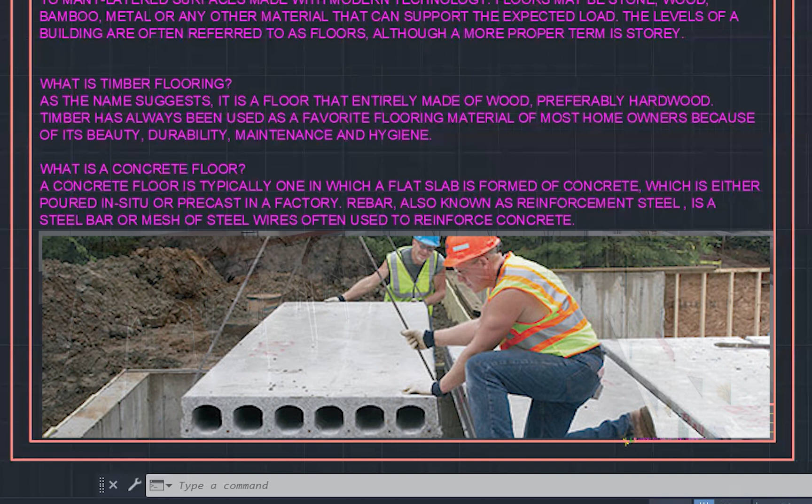What is a concrete floor? A concrete floor is typically one in which a flat slab is formed of concrete, either poured in situ or precast in a factory. Rebar, also known as reinforcement steel, is a steel bar or mesh of steel wires often used to reinforce concrete.

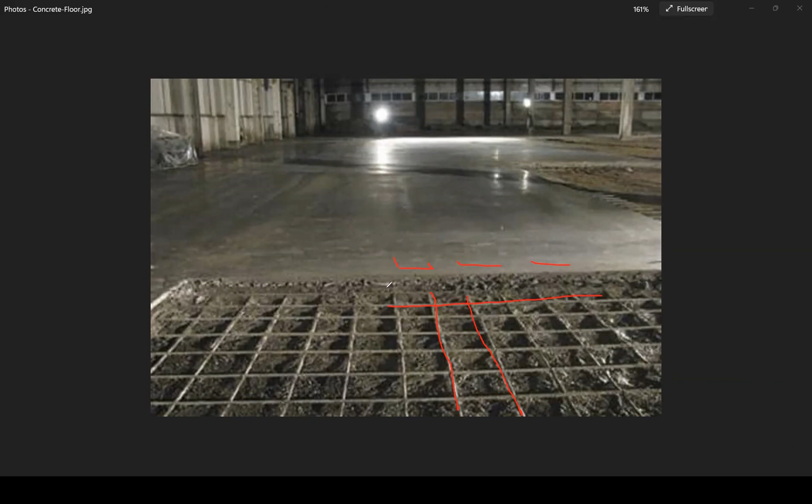This is a concrete floor, and these are the steel bars, the reinforcement bars I mentioned earlier. And this is the concrete here. So you will walk on top here. In this image, you're able to see the steel bars and the concrete, and everything that's layered together to create that floor.

Here's a clearer image of what I was just describing. Again, you can see these steel bars, connected to other steel bars in here. Concrete is all in here. The finish looks like polished concrete because it has that shine and gloss to it.

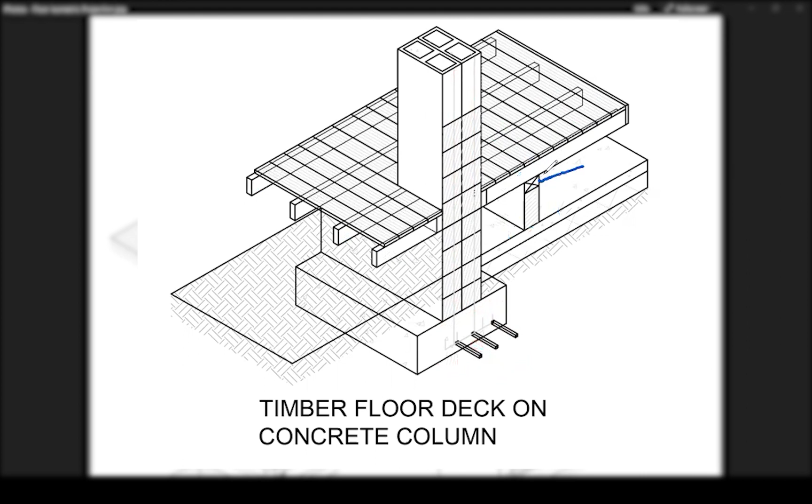You're probably wondering, what's this here? This is a sleeper wall which helps support the flooring. It's made up of block work, this area here. At the top here, that's our wall plate. Let me try to scribble 'wall plate' there.

You would also find a wall plate in roof construction. That's where else you would find a wall plate. So if you are familiar with roof construction, you would recognize that the wall plate occurs there too, in timber pitch roof construction.

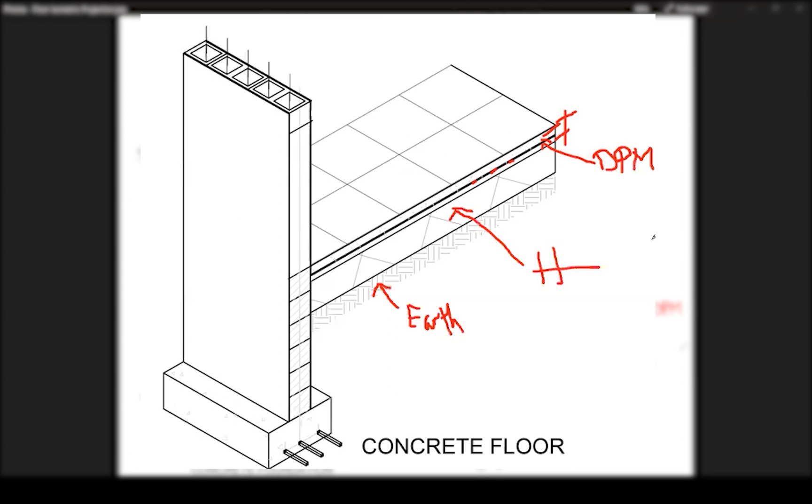Today we are going to be constructing a timber floor and a concrete floor, combining the two of these. So we're going to have two floors, a timber floor and a concrete floor. Let me just show you what a model looks like so you can better understand this process.

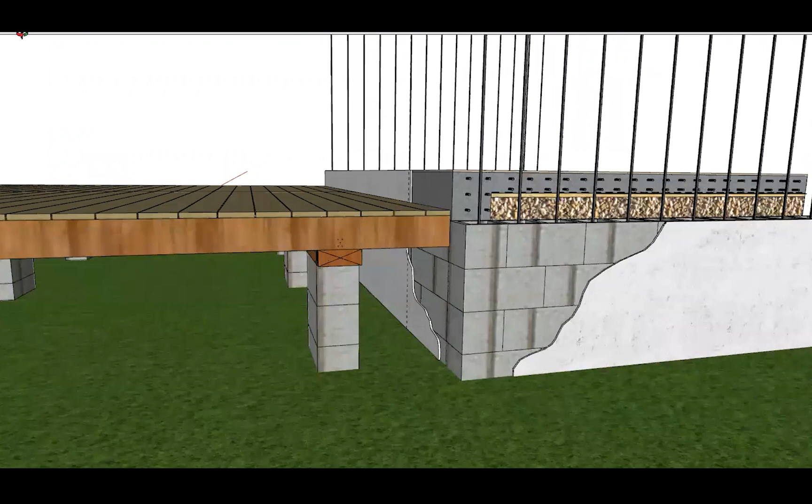Let's take a look at these connections before we start this process. I'm going to come here to scene one. Here is the wall plate that I was talking about, and this is the block work.

This right here is our floor joist, this piece of timber. And then above the floor joist, we have our tongue and groove boards, or our close boarding. So those are the main elements to how this detail is constructed.

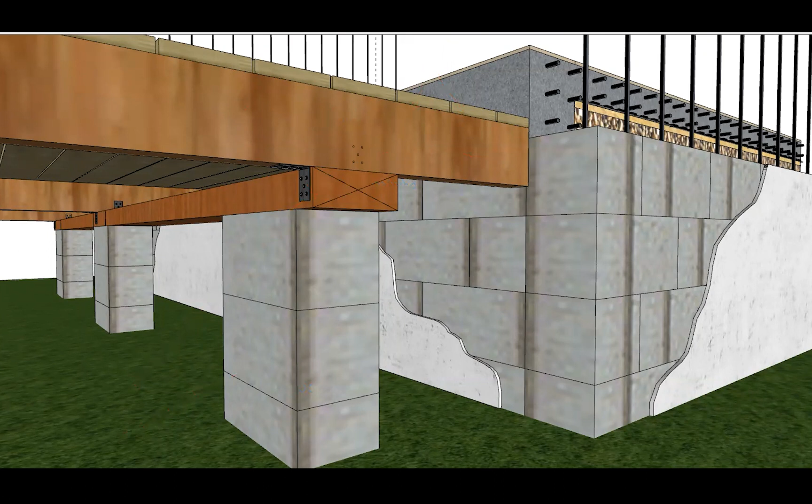But let's look a little closer, go a little deeper. We have here some connections. These make sure that the two members of wood are stable, with the wall plate stable to the floor joist. Throughout this construction you'll be seeing these connections.

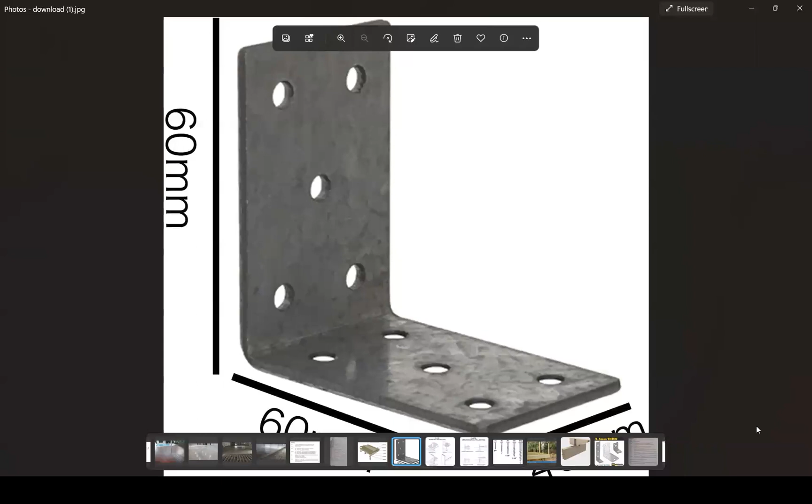What are these connections? These are the brackets here, approximately 60 by 60 by 40, and we use a set of screws. These brackets are about 2.5 mil thick - let me show you, this is the thickness here. This is about 2.5 mil thick, though I've seen some that were 4 mil thick, so they vary between 2.5 to 4 mil.

I think this gives us a general idea of the construction process and the elements we use to create this unit, which is a floor. For my model, I've been using 5 and 3/4 inch screws, and I placed those right here.

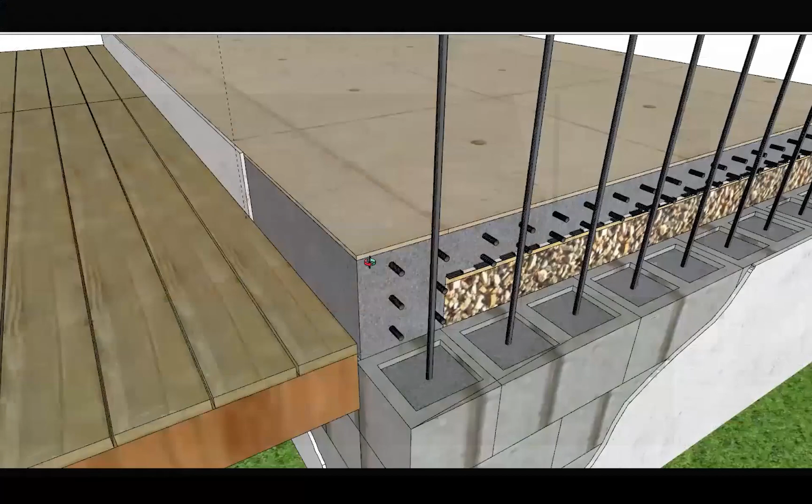Now let's look at the concrete floor. It's made up of reinforced concrete, a layer of poured concrete with steel bars sticking out for reinforcement. Underneath here we see our damp-proof membrane, which I've represented in black and white. This stops moisture from getting into the concrete floor.

Underneath that you can see a thin layer of sand screed, about 20 mil thick. Then below the sand screed we have our hardcore base, about 280 to 300 mil thick.

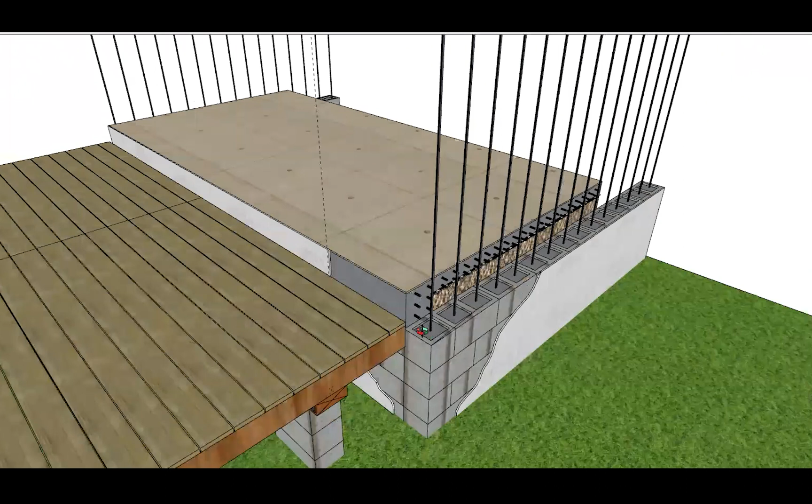Now that we've listed all the main elements that go together to create this detail, I am going to start drawing this detail in AutoCAD. This is what a finished orthographic projection would look like, and I can also show you a finished isometric projection.

As you can see here, this is the timber floor, this is a door, and this is the concrete floor. So we're going to produce both of these today. Without any further ado, let me get started.

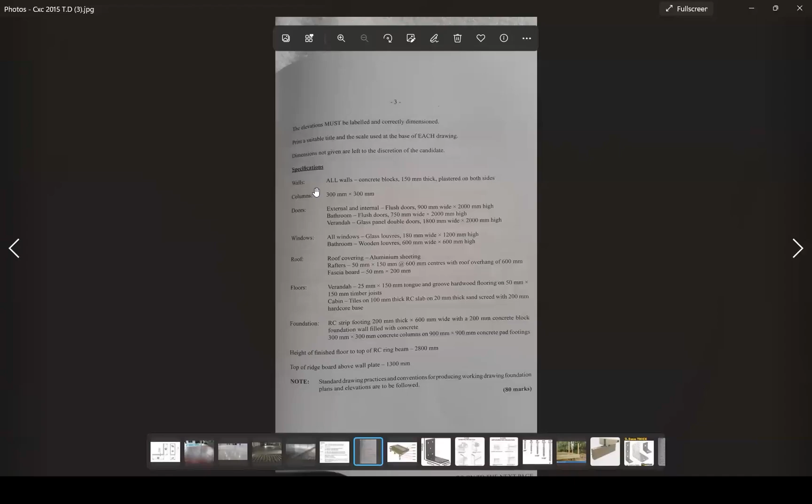But we need some specifications to get started - that's the one thing I need to go through. Let's look at these specifications. I got these from a previous CXC examination, and I think they are useful.

I would encourage all students to just learn these numbers, have them in your head, because they can help you outside of school when you're past this stage of your education. For example, when creating a foundation, you can use a 200 millimeter thick by 600 millimeter concrete base at the bottom, and then a 200 millimeter concrete block foundation wall to cast the walls from the foundation up to the floor level. So what does that mean?

That means then that this would be that - the 200 on the short side, the 600 on the long side. And then you can cast a wall 200 going up there. So this gives you some practical numbers to work with rather than you guessing.

Okay, let's read this out. All walls are concrete blocks, 150 mil thick, plastered on both sides. I don't think that would apply to us because we are only dealing with the floors. The 300 by 300 millimeter column wouldn't apply to us, nor the doors, nor the windows. The roof would apply to us.

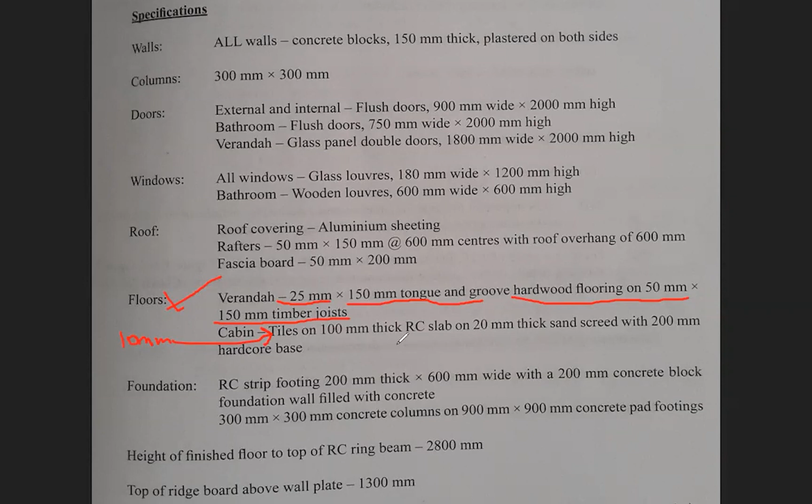But let's look at the floors. It says here, veranda is 25 mil by 150 mil tongue and groove hardwood flooring on 50 mil by 150 mil timber joist. So this is useful information. Cabin, I'm going to use 10 mil tiles on 100 mil thick RC slab on 20 mil thick sand screed with 200 mil hardcore base.

So they're using 200 mil for the hardcore base. I use in my model 280 for my hardcore base. No problem, we will use the 200.

Lastly, let's just read the foundation. RC strip footing, 200 thick mil by 600 mil wide with a 200 mil concrete block foundation wall filled with concrete. 300 by 300 mil concrete column on 900 mil by 900 mil concrete pad footings.

Okay, so this gives us some useful information. So let us break this down and use it now to create our orthographic projection first, and then we're going to move on to the isometric projection. So I'm just setting up my screens now at this stage.

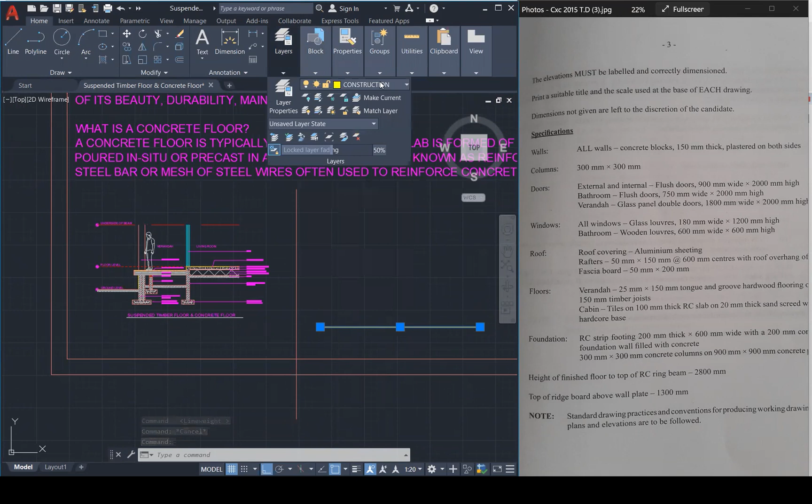Right, okay good. And I'm going to start off on what layer? Construction - yeah, that's a good layer to start with. I don't like how thick this construction layer is, this shouldn't be that thick, so I'll turn off my lines and my construction layer should be thin.

Let's start off with my construction. So what's the first thing I'm going to do? I am actually going to build the floor, the tongue and groove floor, on the 150 mil timber joist, and then attach it to the foundation. So I'm going to start off with the veranda 25 mil by 150 mil tongue and groove board.

Right, so I'm going to offset my 25 mils up. 25 mil, and from this line I'm going to offset 150, 150. All right, so this is approximately my distance - approximately one tongue and groove board.

What I'm going to do is copy this distance, then array about 20 times. Cool, so that's my 20 tongue and groove boards, I'm just going to use 20. So those are my tongue and groove boards in.

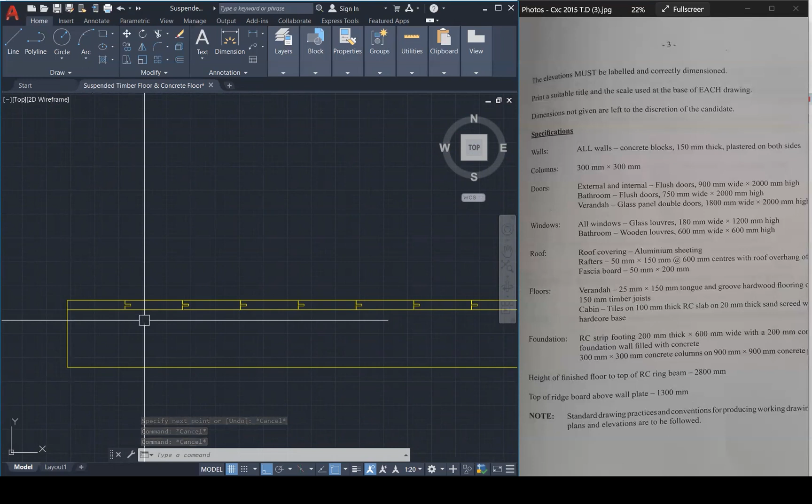Now, what am I going to do? I'm going to place my floor joist. My floor joist is 150 mil, so I'm going to offset 150 mil downward to get my floor joist - that's my floor joist. Let me just close that off, so that's my floor joist there, and the way how it's being laid, that's all we need to represent the floor joist rectangle.

Now, what am I going to do from here? Now we need to rest this on 300 by 300 columns. So let me just start - where do I want my columns to start? I'm going to start my column here. I'm going to offset it 300, which is basically 150 twice.

So actually, you know what, I'll offset 150 so that people would be able to see that this was made from 150 plus 150, sorry. So this is my 300 wall.

Now, I need to give this a foundation. So let's look here - it says 300 by 300 concrete column on a 900 by 900 pad footing. So that means then that wherever we get to our base, let's assume the base is here, this is going to be 900 by 900. Whereas the last one was 600 by 200.

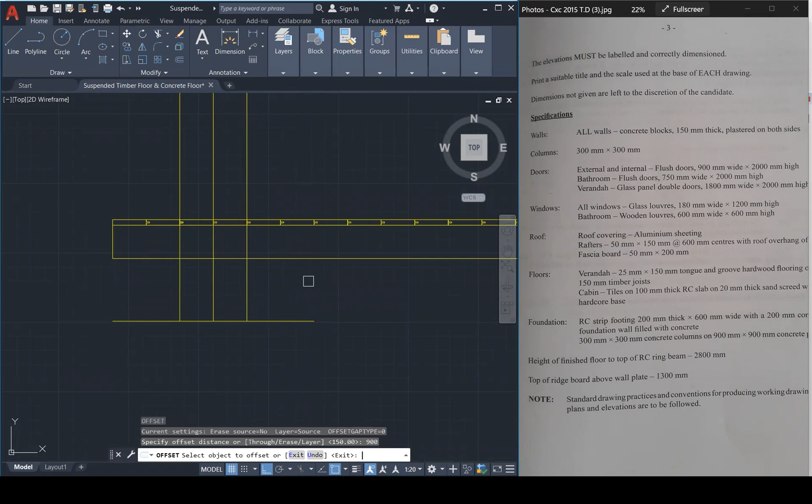And it's going to be 900 by 900, just going to be fairly massive, so I can offset down 900. Let's see how this works out. So that's what they're telling me based on it being 900 by 900.

So this is my concrete 900 pad. This is my column going above. I don't know the height there yet, but we will get back to that later on.

Now I need to create a ground level. I think I'm going to bring this down further, so this gives me more space to play with. I'm going to create a ground level about around here.

And then I need to put in my sleeper wall, which is right over here. I was going to make this sleeper wall 100 millimeter thick, starting right here. Actually, I'll use 150 since they said all walls are 150. Let's do that, offset 150.

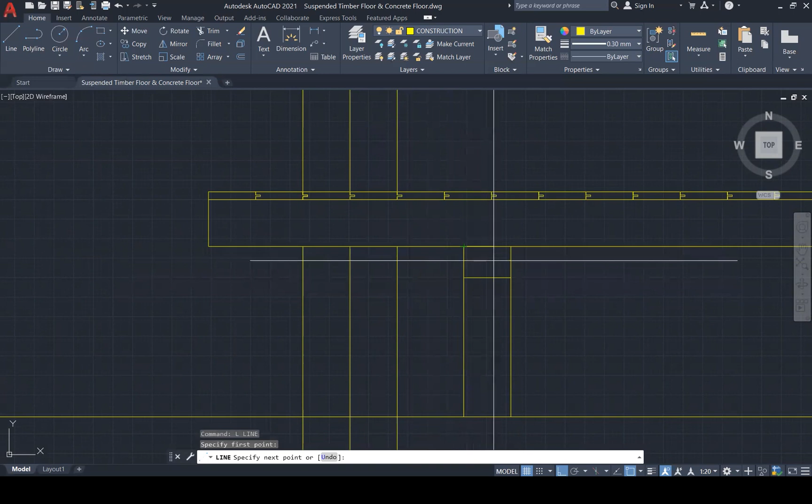Okay, let's put in a wall plate. I'll give this wall plate 50... actually I'll use 100, 100 is my wall plate thickness. Wall plate there, and then put my X to show it. Okay, so that's my wall plate, and that's my sleeper wall that's in there.

Now let's just assume that this detail ends here, because we basically join this with the veranda deck, and we don't have any distance as to how wide it's going to be, so we don't need that distance. We just need the elements that go together to create this detail. So that's the important bit.

So far we have in our foundation a concrete pad, which is 900 by 900, very massive. We have our block walls going up to create the column. We have in our tongue and groove board, our joists, our sleeper wall, and the bricks that hold up the sleeper wall.

Now let us create the connection here as to how the concrete floor interacts with the timber floor. Interesting, now we need to step up. How much do we need to step up? We normally need to step up about, let me measure the step up from here so I can give you the correct distance.

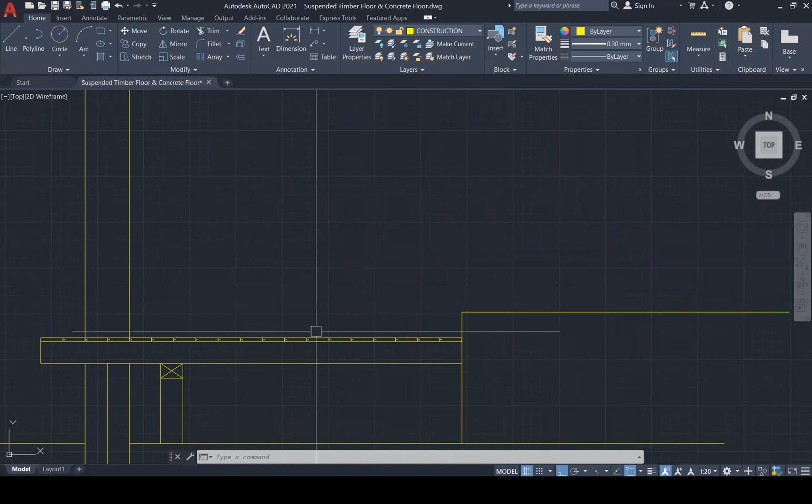Our RC slab is 100 mil thick, but the tiles, like I said, I'm going to put those at 10 mil. So I'm going to offset 10 mil above here for my tiles, and then from this line I'm going to offset 100 mil down to get my RC slab thickness. So this is 10 above and 100 below.

So go offset 10 above, 100 below, and these walls are going to be 150 thick. Although what it says here is interesting: the concrete block walls are 150 mil thick, but the walls coming up from the foundation are 200 mil thick, right?

So we've got to work with the 200 mil thick walls that come up from the foundation up to the floor, not the 150 mil thick. The 150 mil would be above the floor. So anything above here would be 150 mil thick, right? Once it's below here, it would then be 200 mil thick because this deals with the foundation wall.

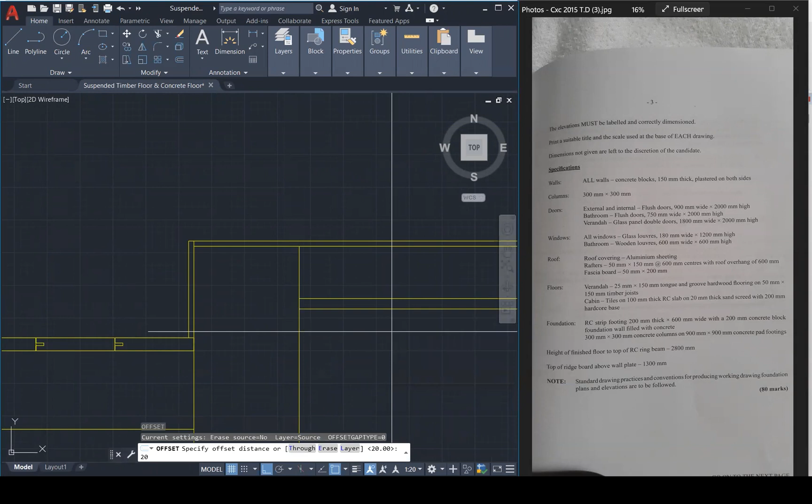Put in 10. So 20 didn't go in, so I can just delete that and offset 20. Got my 20 mil thick sand screed, and then my 200 millimeter hardcore base. Offset 200 millimeter hardcore base. Cool, so I got it all in.

And on this now, this goes down. So let's bring this down to at least one level so that we can all start our foundation line here. Let me just trim here. All right, so what am I going to do at this level? I need to create my 600 by 200.

Find the center, opening this to 300. I know your distance needs to be, total distance needs to be 600. I'm going to just set this down to 200. And I got that, right? Draw a line there, draw a line to there, and that's it.

I think I'll join these lines. J for join, select. These lines are now one horizontal line. Yeah, they're all joined. So that's my base. And now what am I going to do?

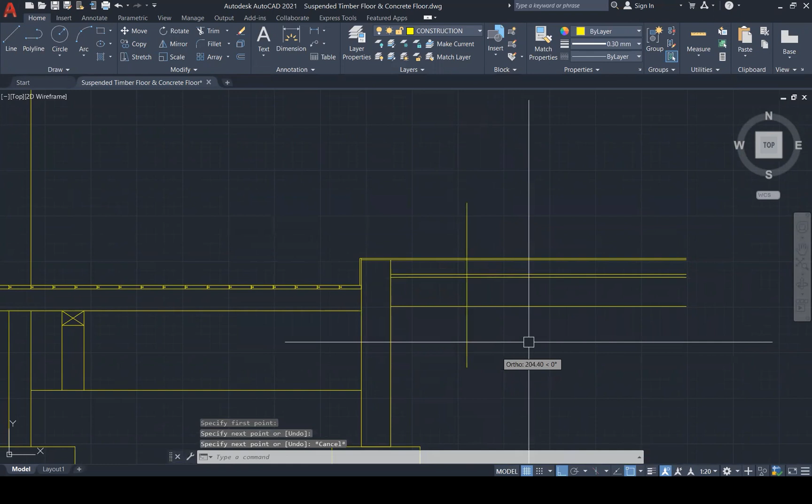I'm going to start hatching and start putting these into respective layers. So I need to cut off this floor because this floor doesn't need to go all the way back here. So I'm going to just snip this floor here, and so that floor would end there. And this essentially would be our floor, our concrete floor and timber floor detail.

Now let's start putting in some textures in here so that this can come alive. So what I'm going to do is give the ground a thickness, or the earth here, a thickness of about 200 mil. Yeah, it's very important to do this.

Now I'm going to start putting in the hatch for the earth, and this is the earth hatch over here. What hatch did I use? I use earth, and a scale of 200 millimeter. Just 200 is the scale factor, and 45 is the angle. What I normally do is hit H for hatch, put it in, and then I would match these back here. Then I remove the bottom line of the earth, to show that the earth continues, so I don't restrict the earth into a box, right?

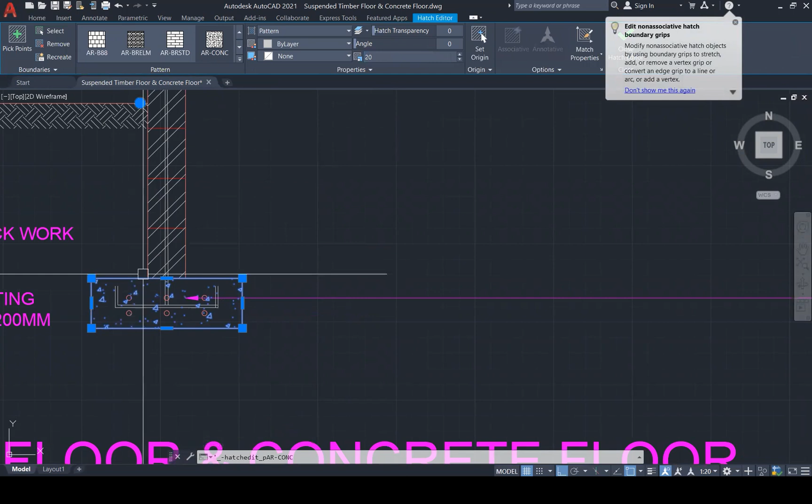Now next thing, I need to put in my concrete. So the concrete is going to be at the base. Let's go over here and see the concrete properties. What did I use? I used AR-CONC, scale of 20, no angle needed. H for hatch, and put that in there. And match prop that so I can get the color and it can go into the respective layer, the proper layer, which is the hatch layer. Yeah, so that's my concrete in there now.

Now what am I going to do? I need to put in my block work. This is my block work. I use ANSI 32, again that's ANSI 32, that's the code name. The scale factor is 200, no angle needed for this one. So put that in.

It can be done like that, or it can be treated like here. How am I going to treat this, resolve this corner detail? I think... you know what, I know what I'm going to do. I know how I'm going to resolve this.

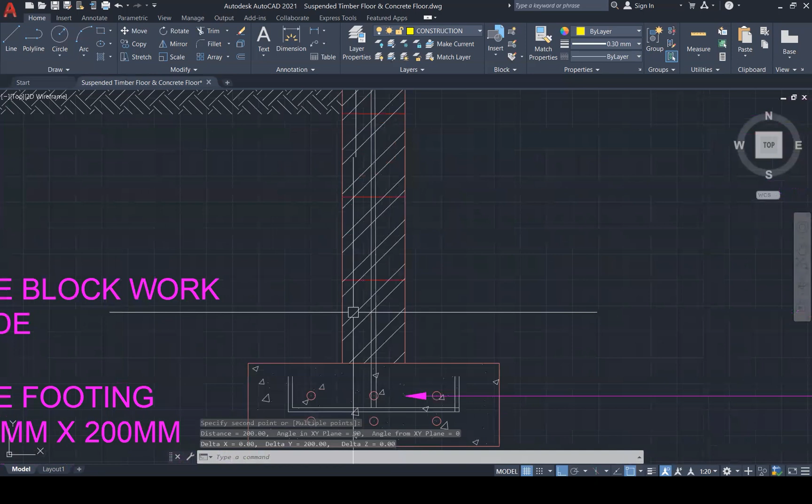Let's start putting in these lines which indicate the bricks. So each one of these lines indicate the levels of the bricks. What's the distance between bricks? The brick is about 200 mil, so I'm going to offset 200 mil to where that last brick line goes. Then I'll put the rest as concrete. That's 200, 200. Okay, so that's roughly about there.

So that means this is concrete. In here, then will be concrete, so I can just start putting it in. But these are bricks, bricks, bricks, bricks, bricks. Let's trim these in.

So these give the builder an indication of how many bricks you would need before we get down to the base: 1, 2, 3, 4, 5, five bricks, five levels of bricks. And then we get down to where our base is, our concrete base. Now let's do the same thing over here.

Look for, remove this, remove this, remove this, remove this, making the detail look neat as I proceed.

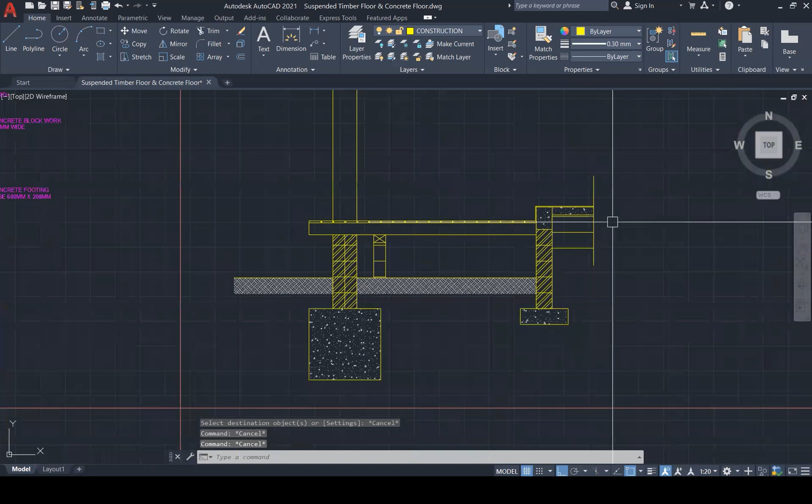So I don't want this detail here. I don't want this expression here to represent my concrete, but it's already in here, so I'm going to just match prop and change it to what I want, just like that. Okay, also all in here is concrete. And then match prop it. And that's our concrete. Now I need to put in my blocks here. Block, block.

Probably just might be in there. Concrete, you never know. In there, concrete. Anyway, let's move on. So far, so good.

This is going to be earth down here. Let's open up that to show that the earth continues. This is going to be our hardcore, which is represented with these triangles.

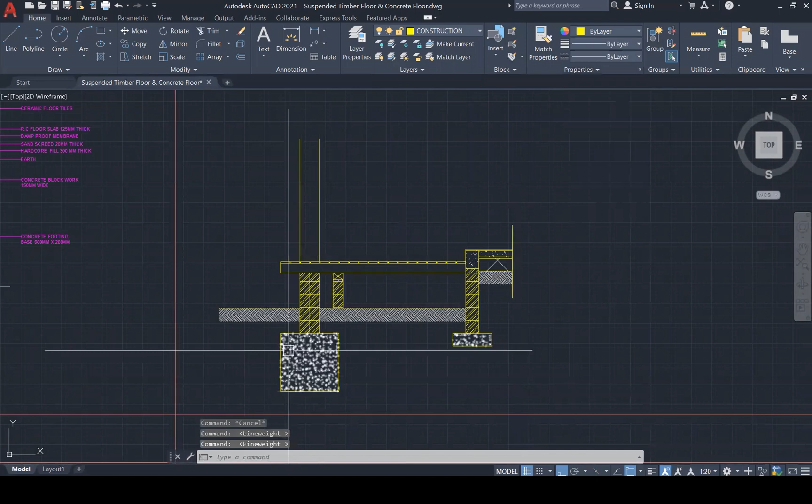Okay, so far, so good. Now, what else do I need to put in here? I need to represent my tongue and groove boards. Let's look at the hatch that I used here for those.

The hatch is user. Now I'm going to copy this hatch out. Because I made my boards a block. You know what, this is the hatch here. So now I'm going to just analyze this hatch.

It's user, scale factor of 5, and the angle is 45. I'm just going to put it in there. Yeah, nice and easy.

Put it in there. See, this represents the wood as we are cutting through the tongue and groove timber.

I'm going to put it into the hatch. There, that's good to go. Now, this one, change this angle to 0. And nothing changed.

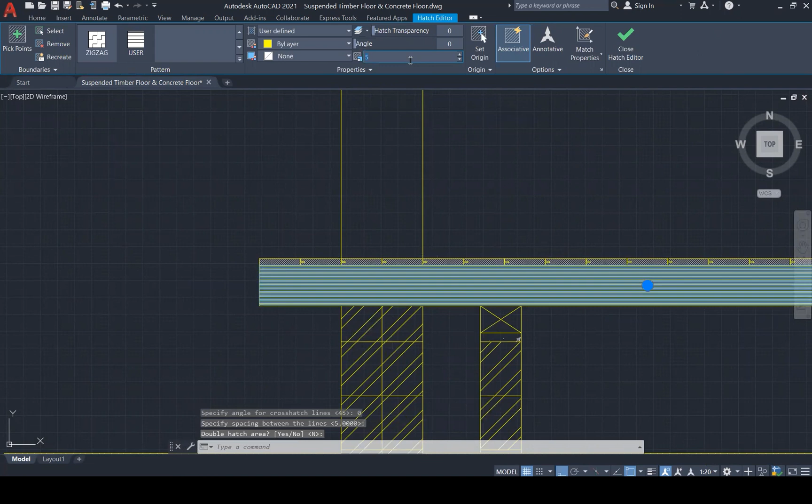Change the angle to 0. Okay, the angle changed. And I'm going to put this at 10. Put it at 15. Yeah, 15.

This shows the grooves also in the wood. It represents wood if you're looking at it from the side profile.

So I think all of my important bits are in now. What do I need to do to finish off this particular orthographic projection? I need to transfer these over to the outline layer.

So I'm going to just turn this on. I'm going to turn on the match. And I'm just going to go around and change this.

Why am I using outline? Because I'm cutting through materials. So I want to show the profile, cut through these materials, right? That's why I really use outline.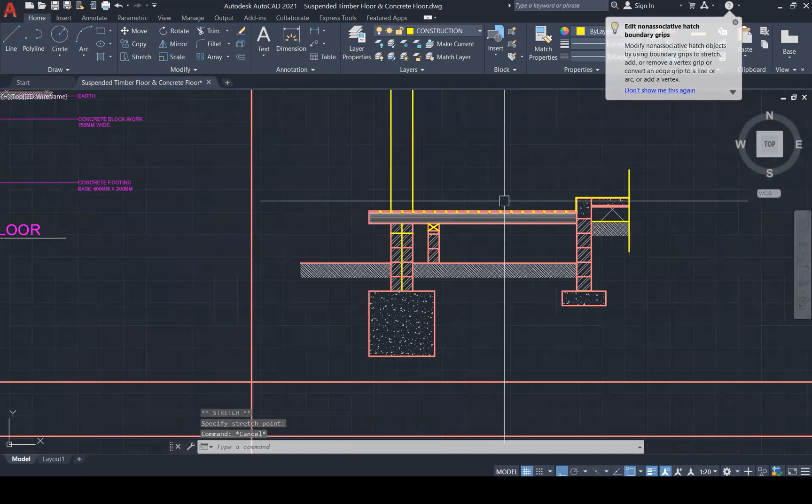Now I'm going to just assume that you will start your bit here. Just a little cleaning up, that's all we're doing now, putting things into the respective layers.

Drop this just right there, which is my reference layer. But this is looking a bit thick in here. I just don't want it looking so thick.

Cool. So is there anything else that I need to add to this detail? Oh yes, I need to add the sand screed, which goes around here. So that would be code AR.

Sun, somewhere around here, so let's look for it. ARSAND, that's my sand screed. I'll put that at factor 10. Yeah.

Now I'm going to put it into the hatch layer. And I think I've done it.

Let me just transfer these construction lines and make them a thinner profile, because they don't have to be that thick. Wherever you see the construction lines thick, I'm changing them to a thin profile.

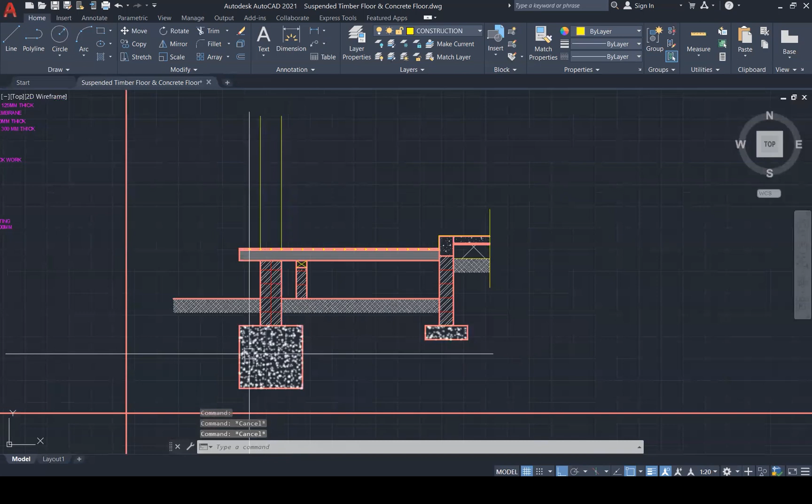So let's review here. Let me save, control S to save. Let me just review what I have here. I have my concrete pad base, which is 900 by 900, which is very massive.

This rises on a 300 by 300, sorry, a 300 thick concrete block wall going up. This is a column, this is my floor joist, and these are my tongue and groove boards here.

Floor in here with my RC slab, 100 millimeter thick, resting on 20 mil sand screed, hardcore base of 200. And then the rest here is just earth, just to show that the earth continues.

All right, cool. Now, what am I going to do now? I am going to label, and then I'm going to draw the isometric. So let's label, I'm going to grab one of these labels here.

Just put them in. This is, let me see, is this correct? Let me draw, set up my margin line so that I know that all my labels don't go past this line. We start right here.

Okay, so this is concrete footing base, 600 mil by 200. That is correct, so I'm not going to change that.

And the way how I'm going to label this is I'm not going to be writing any, I'm going to be pulling the notes from here to save time, right?

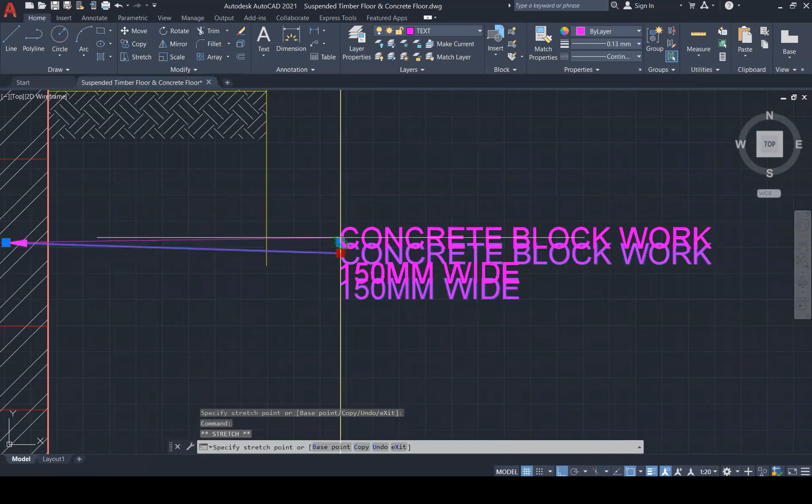This one is 200 millimeters thick, but the note says 150. So I'm going to change the note to represent the thickness, which is 200 millimeter wide. Concrete block work, 200 millimeter wide. All right, there we have it.

Now let's move on to the next note. This is my earth, that is correct. My hardcore, my sand screed. I don't have damp proof membrane in this detail.

RC slab. So I'm going to grab these notes, copy them, and insert them over here. Okay, I don't think I put them in properly. No problem, we can just rearrange them.

So this is the earth, we move this up. Let's say earth. This is the sand screed.

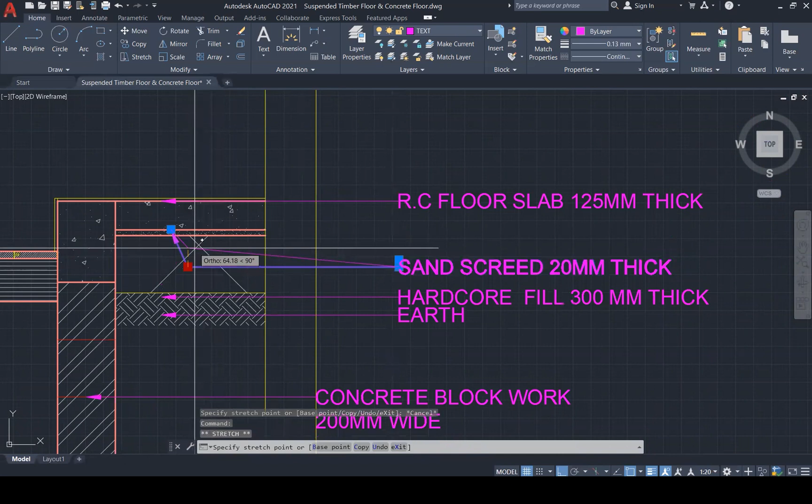This one will be a bit tricky, so I'll put that in probably from the top. This hardcore base, this needs to change. I doubt this thickness is 300. Let's just check. Now this thickness is 200 mil, so this will change to 200 mil thick.

And my floor is not 125 mil thick, my floor is actually 100 mil thick. Let's just measure it. Mil thick distance down here. So I'm going to change this to 100 mil.

Good, now my sand screed. That's my sand screed here. So everything comes to here. Bring everything to this margin line. All right, so my sand screed, 20 mil thick.

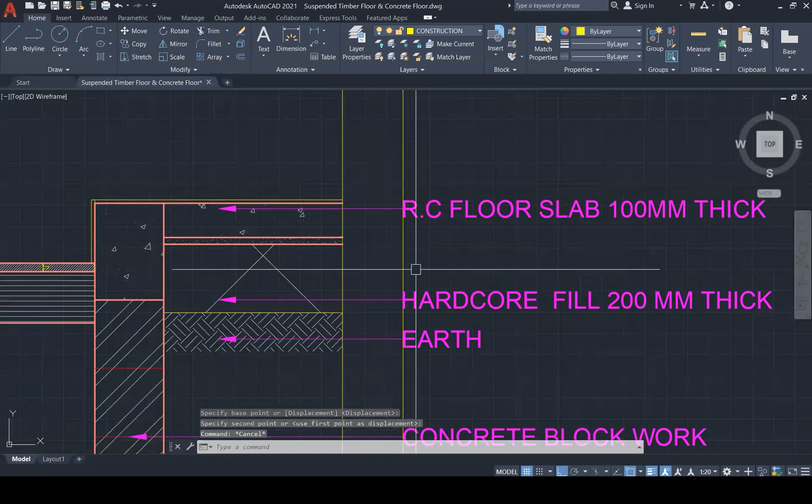That's good, that's good. Actually, you know what, I'm going to put in another note. Cut this, delete that, and bring this note here, bring this down here, copy this up to here, right in between there. Control A, select, backspace, then Control V.

Okay, so I made it look neater. I placed this sand screed where it's supposed to be, the reinforced floor slab of 100 mil where it's supposed to be. What I need to do now is call out the tiles. So I'm going to pull this out. Yep, and I think this is where I can do that, and I'm going to call that tiles.

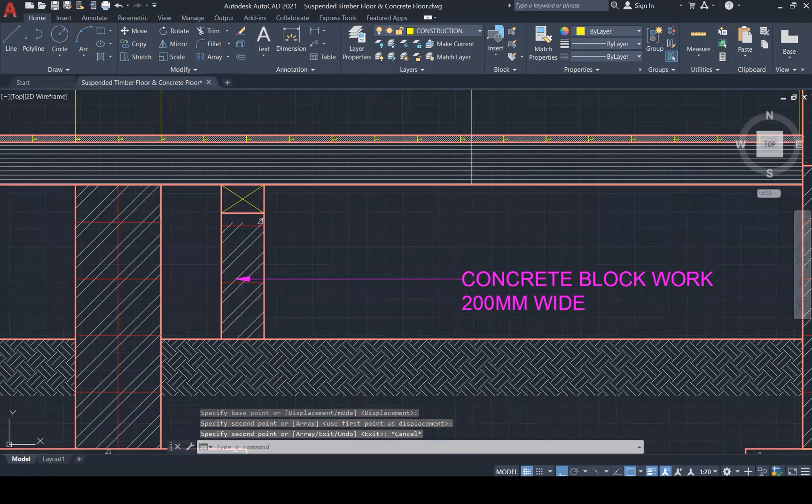Okay, we get a steeper wall, S-T-E, wall. Up, and we get a wall plate here. Wall plate.

Should I say the steeper wall is? I think that was 150. Let me just remeasure. Yeah, I use 150. I'll put that in as 150 mil. Okay.

Yeah, this one here now, this would be 100 by 150. 100 multiplied by 150 mil. Yeah, okay, cool.

And this will be called up as concrete footing, 900 mil, 900 mil. All right.

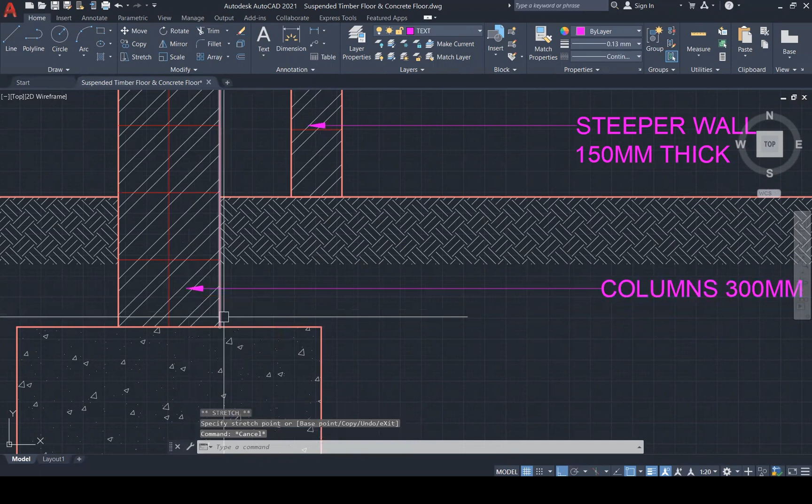Let me just bring this closer to the action. Okay, so far so good. So we got our wall plate, our steeper wall, the columns 300 mil, the concrete pad footing 900 by 900.

All right, now what we need to do is call out the tongue and groove boards, and we need to call out the floor joist. We're just going to do something like that. Point at the tongue and groove boards, double click there. Tongue boards, and these are 125.

No, these are 25 mil. 25 mil by... just remeasure. Yeah, got my tape. That's 150, and this thickness is 25 mil. Perfect, perfect, perfect.

Anything else that I didn't put in? No, I think I got everything in. So I'm going to now add a couple dimensions before I finish this off. Dimensions, DIM.

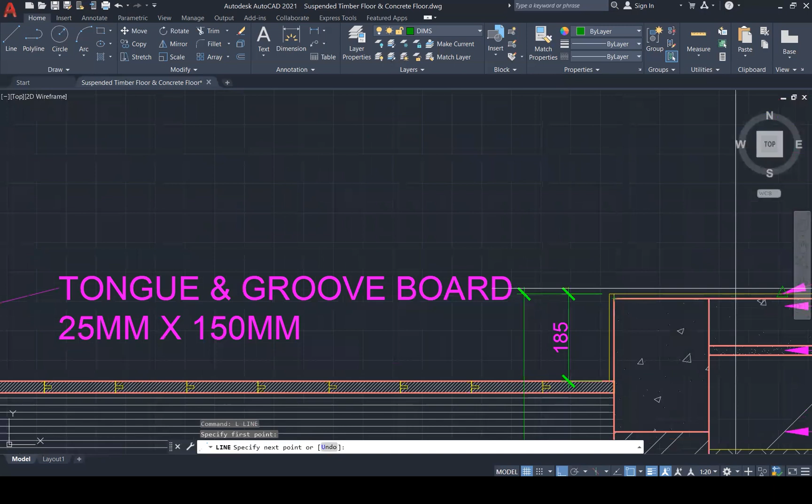Very important, so I'm going to project this line across here. The hidden line. Okay, yeah, hidden two. MText, create a note here.

Five. Does 5 look good? That's a good size. Let's try 3. Yeah, 3 looks good too. So I'll go with 3.

Just closer to here. That's the finished floor level. All right. So I can save this now, and I can now proceed to building my 3-dimensional detail.

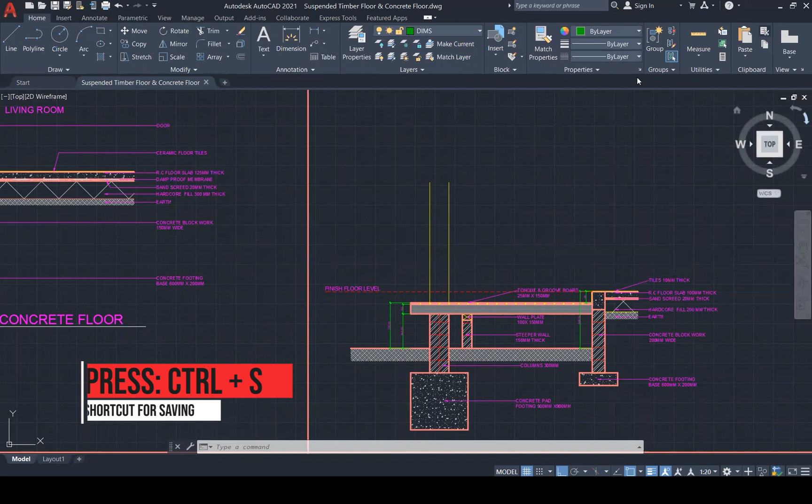So far, I think we're going good for time. Oh, I need to give this a label. So I'll just bring this up here, grab it, move it, put it here. I just like to put the human scale in so that everyone will be able to understand, hey, this is what this will look like in reality, and this is how a human would feel in the space.

Now, how are we going to draw this 3-dimensional detail? Well, first thing, I am going to be switching over to the polar tracking, and I am going to be using the 30, 60, 90, and 120 degrees. Let me just switch over there, and let's start.

So I'm going to use this now to separate my joints, and let's start. Alpha line, and I know I'm going to start off with my floor joist. My floor joist is 150 by 50, right? So I'm just going to come here and let's make that 50. Let's come down here at 150. Let's go back here 15 in this angle. Okay, let me start over because I'm not doing a very good job of explaining how I'm using this tool.

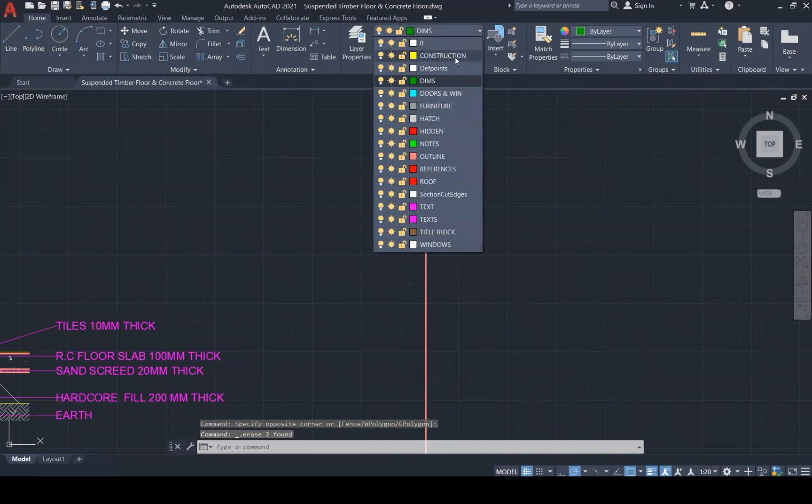Alpha line, enter. And I know that my vertical lines are always 90 degrees. My horizontal lines on this plane, I'll be using 150 degrees if I'm going left. If I'm going right, I'll be using 30 degrees. If I'm going right up, I'll be using 30 degrees. If I'm going left below, it's 210. If I'm going right below, that's 330. So those are the numbers I'll be using. But I don't have to remember these numbers because once I get in the position, I get a green indicator that tells me I'm on the correct angle line to use.

Right now, what I'm going to do is this floor joist needs to go back. How far does this go back? Let me just roughly get a measurement from the floor joist that I have here. It goes back 2,850. So I'm going to copy, and then I can send this in that direction, 2,850. Okay. Now I can connect these lines there to that.

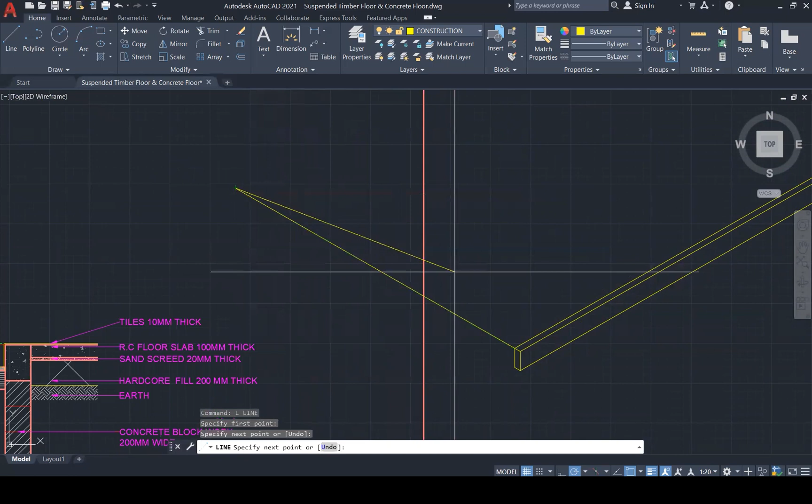So that's my floor joist in right there. But the floor joist occurs ever so often. It's not just one floor joist we're going to do. So I need to give this a distance. So I need to assume a distance now. How do I want to go about setting up my floor joist? And what distances am I going to use? Just going to move this slightly out of the way so that when I give this whole thing a distance...

Let's give this a distance of, let's divide it, let's just pull this line out here. Again, I'm drawing this very loose because I'm not interested so much in dimensions. I'm interested mainly in just sketching this out. So these dimensions, when you see me extend lines loosely, you can do the same thing too. That's div, divide, and I'll divide this into 3. Why did that appear? Because I need to go set my point type, which is my PTYPE, and change it from a speck of dust to some expression.

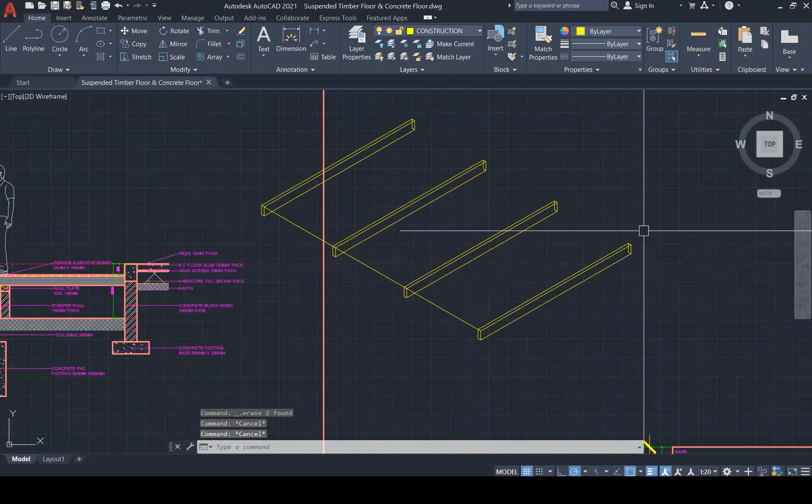It's there. So what does this mean? At these 3 points, I am going to be placing my floor joist. So that's 1, 2, 3. Yeah, my floor joist occurs at those points there. All right, so just remove the points to make this look neat. Now, I'm not always going to see the floor joist looking this way because, for example, when cleaning this detail, we don't see this back here. We're not going to see this back here. So just removing this as I go along. Grabbing and deleting.

All right, so I got that in. Now I need to create the tongue and groove boards. Okay, not a problem. So let's start with that now.

The tongue and groove boards go up top here. So let me come to this corner and create my tongue and groove board. I go 25 mil, then across 150 mil, and now I come down. So that's one tongue and groove board, but I need to put in a little expression here.

So I come out 15, and I am going to go up 2.5 here and bring this back in, then go down the same 2.5, so as to give this a total thickness of 5, right? All right, I think that looks good.

And now I'm going to trim. Okay, so that is my tongue there.

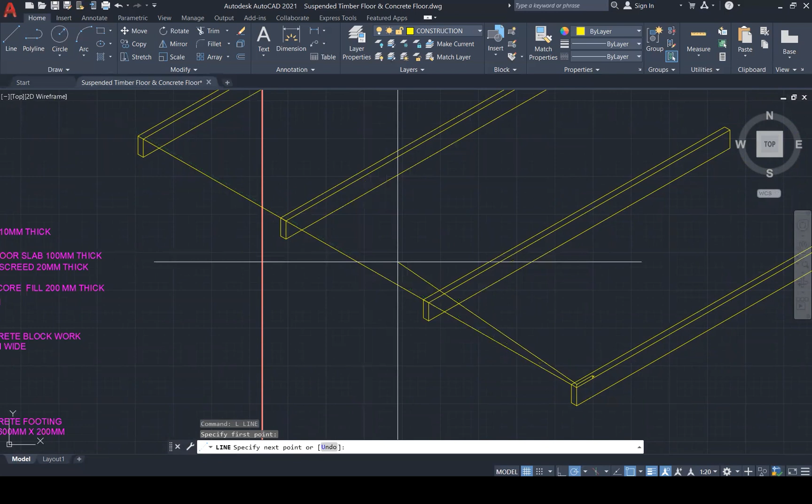Let me just make this one complete one. So that means I'll pull this. Reality is you're not going to get a piece of timber stretching all over here. You'll probably get a piece of timber that comes up to here, and then you would have to add another tongue groove board there.

So this would probably be one tongue groove board, which goes this distance, then you would add another one. See that? You're not going to see that. You're just going to see timber there.

So that's the tongue and groove board, one is placed. And now I am going to copy. I can give this a hatch.

Now at this stage, let me go to user, and let me switch this angle to 60. I'd use 30 — no, definitely not 30. 0, I'll use 0, and I use 5. Yeah, it's good, looks good, looks good, looks good.

Now let's copy this and array it 25 times. Copy, copy, copy, I think I got all my selections ready to copy array. So, place here, this is my base point, so I'm going to click here first, then go and type A.

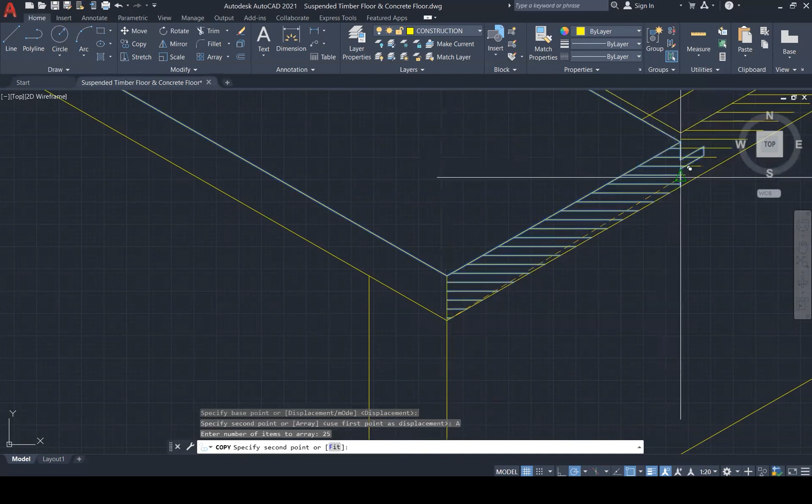Enter number of items you want to array. So I need about 25 items. Just go 25, and that's there, and I just click it in right here, and everything should be arrayed.

Yep, done well. So I don't need it past here. This is where I'm going to just delete the rest. It's better for me to array and then delete the rest — better in terms of time efficiency.

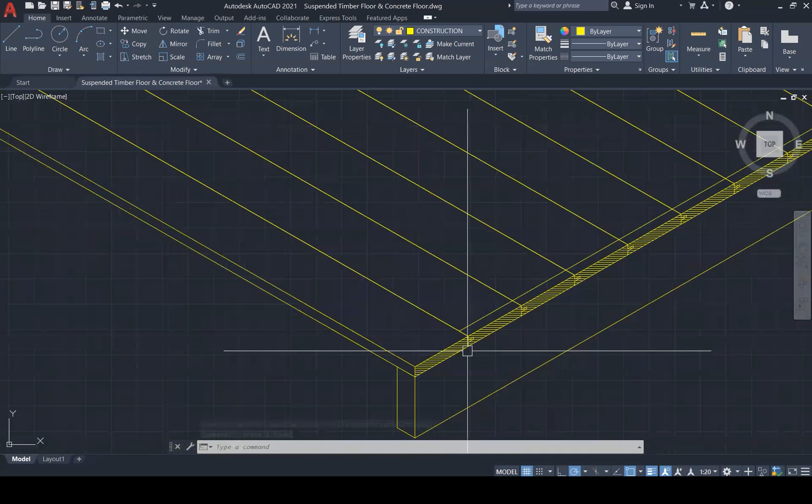So what am I doing now? I'm just cleaning out the bits that you wouldn't be able to see when these boards are laid down. It's lying back there, this won't be seen. Sometimes what I do is represent these lines as hidden lines.

Probably come back and do that later on. But for right now, I want to see this thing as is, not particularly interested in seeing what is hidden under there.

Okay, so that's in so far. What am I going to do? I'm going to change these from construction to hatch, transferring the hatch.

Using the array tool really helps to save a lot of time. So I would advise my students to learn that array tool properly.

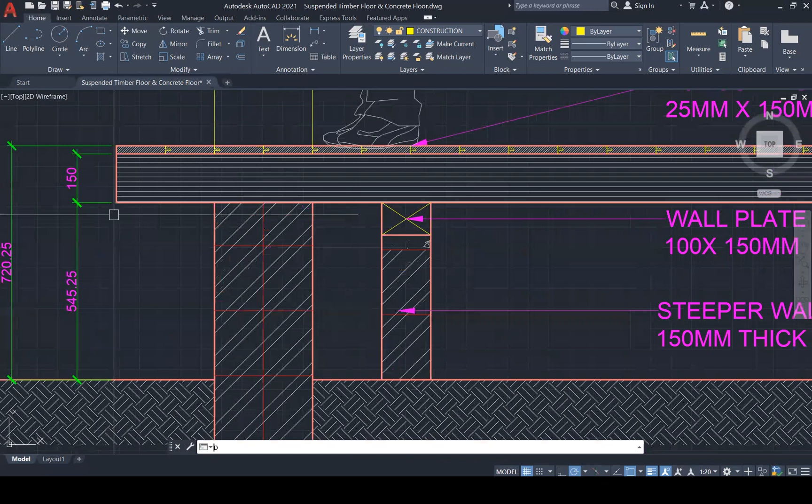Okay, so that's in. I can put them in around there if I choose to, but I'll just leave that there for now. Now let us go to putting in this column. So how far in do we go? 300 distance — oh, that's a nice number.

300. Now I'm coming down, create another 300 distance, and now this is also 300. So this is going to go back in.

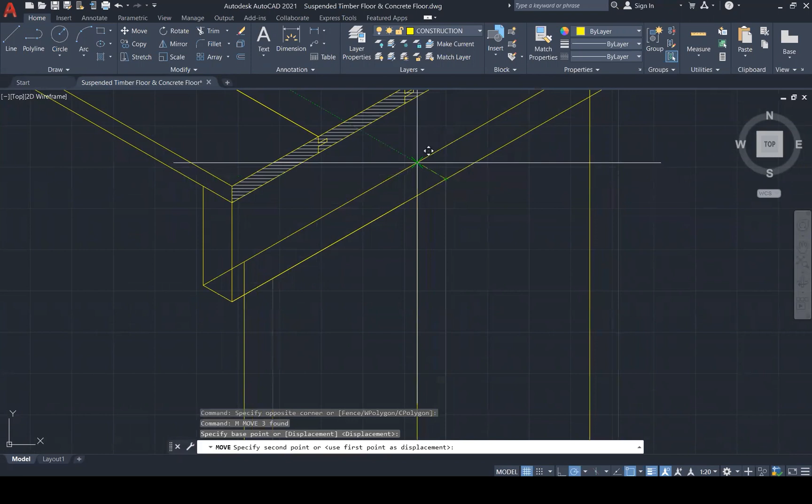Now let me just move this slightly. Perfect. Then just double it. Okay, let's just get it placed under there.

Just adjusting things. Not much of a difference, but to me it does. So let's get this base now. This is a 900 by 900 base.

Here, that's 450, then this will go down 450, and then this will come across 450. Oops. And grab this and copy it here.

And then I can move this and put that in there. And this. Copy this line around, copy, to bring this to a close. Copy. Trim.

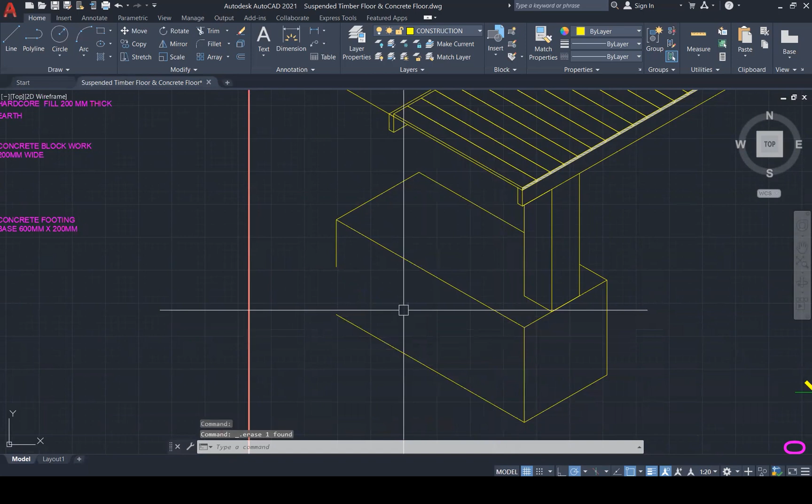So good. I need to bring these lines through. Here we go. Column. And then you see the column.

So I should move it from this angle. Okay. All right, and now I'm going to trim.

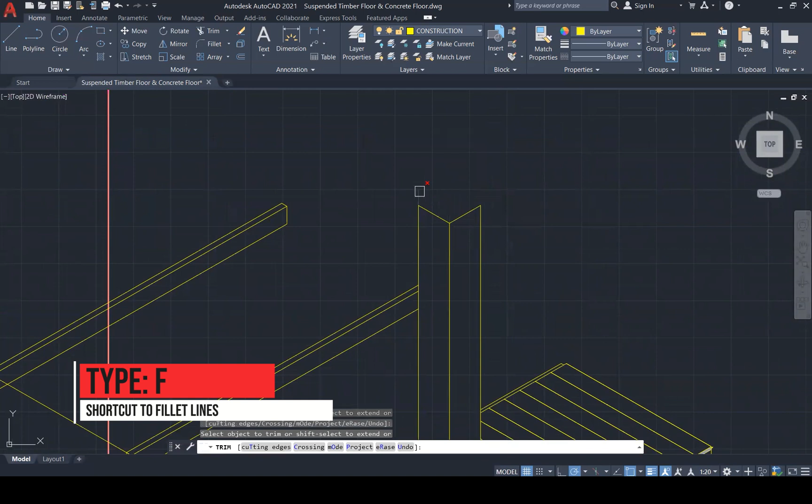Cool, so this is our square column, 300 by 300. It's already locked and loaded in there. I'll leave that there for now. If anything, I'll probably study that detail later on.

Now we need to just clean off here. Trim this. And then use join these lines. J for join, enter.

Thickness here, that is 200. 200 plus 200, and then comes in. All of my levels down to that point.

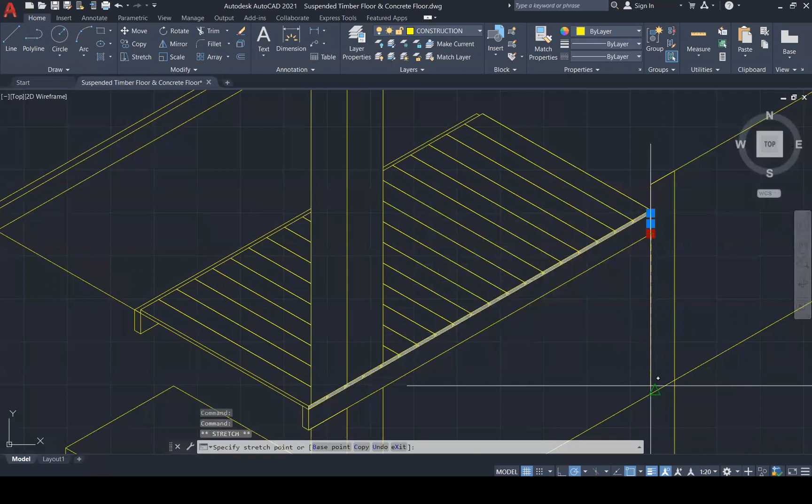We'll just, says intersection. So this base is a 600 by 200. Just center point.

Perfect. Bring that in that direction. Okay, right there. Right there. Okay, see that? Cool, cool, cool. So far, so good. It's going to get in that direction.

Now I am going to put in the tiles. So let's put in the tiles. Thickness, about 10 mil. Pull this back here.

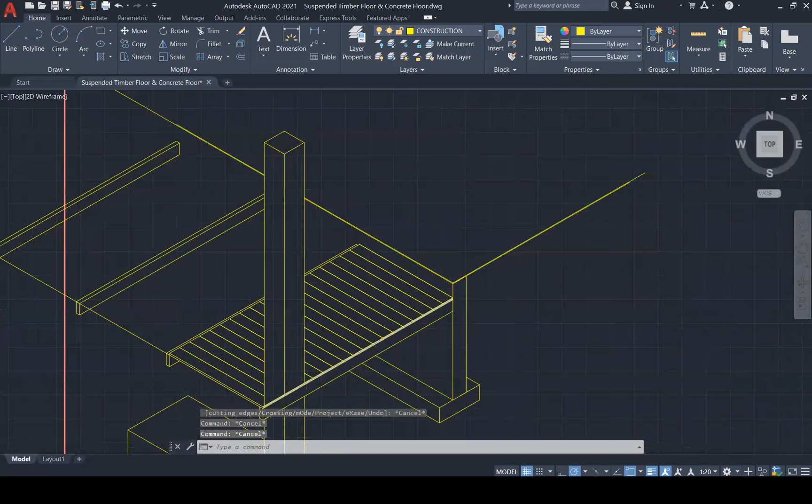10 mil. Distance. See that up there. You know what, let me just create this back line so it can extend.

This line goes all the way in the back. You just send that back in there. Okay, yeah, fill in these. Cool, just my surface there where my tiles will go, so I can put a hatch in there and call it tiles.

So let's look for net. Let's look. So I will use net, and I will probably use 500. Let's see. 1,000, I mean 1,000, 500.

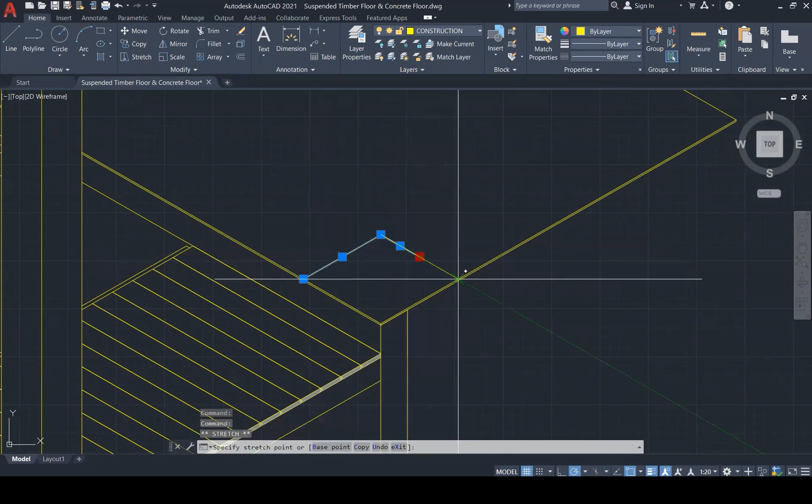Copy. We go 6. Then extend. Yep, no copy. Select it, CO for copy.

Come here, all right, A for array. Let's go 7. Trim, trim, trim. So they're all in, they all look good.

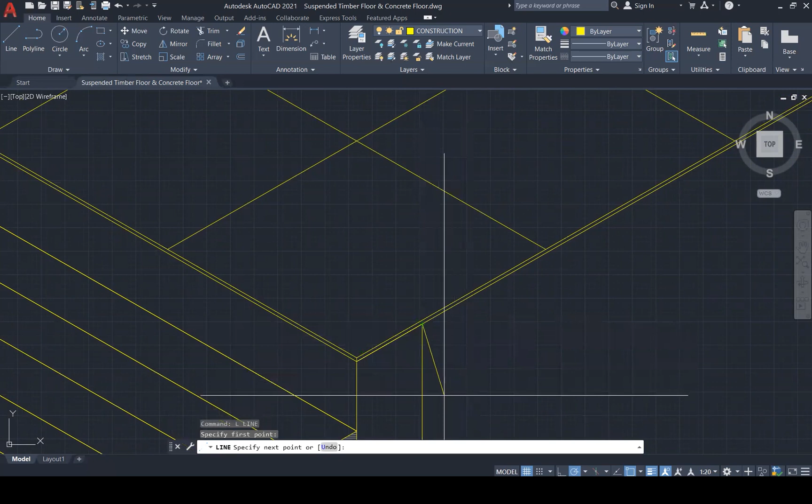And now we can proceed. Right, so now, excuse me, let us create the RC slab, which is 100 millimeter thick. So this means I need to come down 100. You put that in, give that a thickness.

I didn't expect this floor to be this long. It's true, I might clean it up when I'm finished. That's my RC slab there.

Now I need to come down and move this down 20. Move it, copy it down 20. So go for copy and push it in direction down 20. Then copy this last one down.

How much is this one? Let's check, how much is the hardcore? 200 mil, so bring it down 200. Copy that. And lastly, the earth is about 100 mil. I think I got everything there.

Now I just need to place these into the proper layers and hatch.

I think I'm going to move the position of this column so that it reads better. That's what I am going to do. So this whole column expression, I'm going to move it so that it reads better in this drawing.

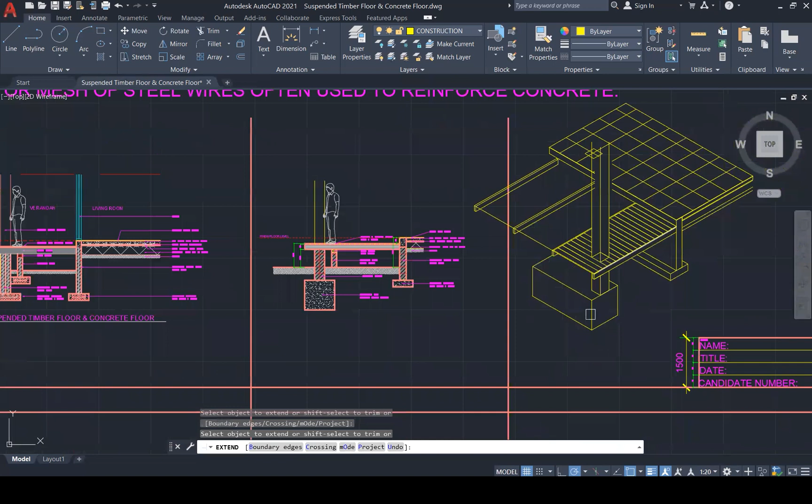Like that, and you don't need to see that down here. This will not be seen, and this will be extended to there or somewhere in there. Then of course you don't see this, you're not going to see that. And that is how that would be expressed. So the column goes right through the tongue and groove boards. That is what I was getting at. This is what I wanted.

So this is my part of detail, and this should cap this off. Top here, yep. Trim, trim, trim. Extend, extend, extend, extend. Okay, so let's save that.

And let's observe what we've done and try to analyze if we are going right. So I got in my column, my column comes up, column is up. Got in my tongue groove boards, that area has been resolved. Got in my floor joists. Now I need to put in my sleeper wall, yes, my sleeper wall needs to go in so that I can show the support here. Sit between.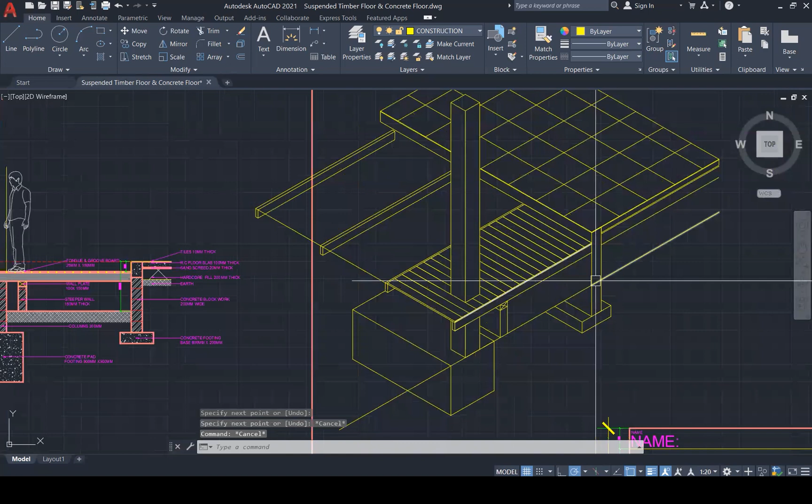So that's the ground line there, that's my ground line there. Okay, and this ground line continues on this way. Continue there, that. All right, so far, so good.

Now, right, I'm going to start hatching. Or do I need to put in anything? Oh yeah, I need to put in these tongue and groove boards here. So we can grab a few, put them in.

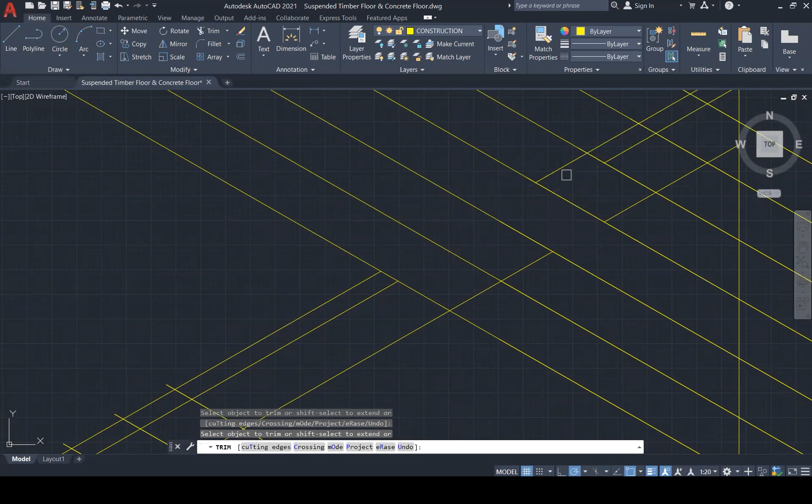Okay, so those are in. That means now let's take this one. All right, and what am I going to do now? Trim here, trim here, it's not going to see these anymore. So some I'll leave exposed, and some I will put in properly. Just leave that there exposed so that you shape the detail better.

And what needs to happen is that these tongue boards need to be divided because they're not going to be one strip right across the whole floor. Come on, just delete this. Bring these and terminate these ones here.

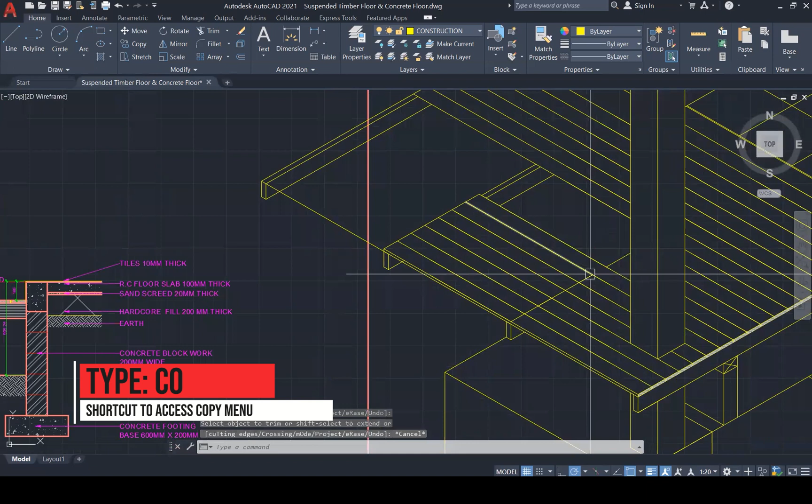Right, this line here. Right there, the center. Yeah. There, I want to copy that, remove from there. And that, so that takes care of that, that takes care of that. So there's a hole in the floor, there, so you know.

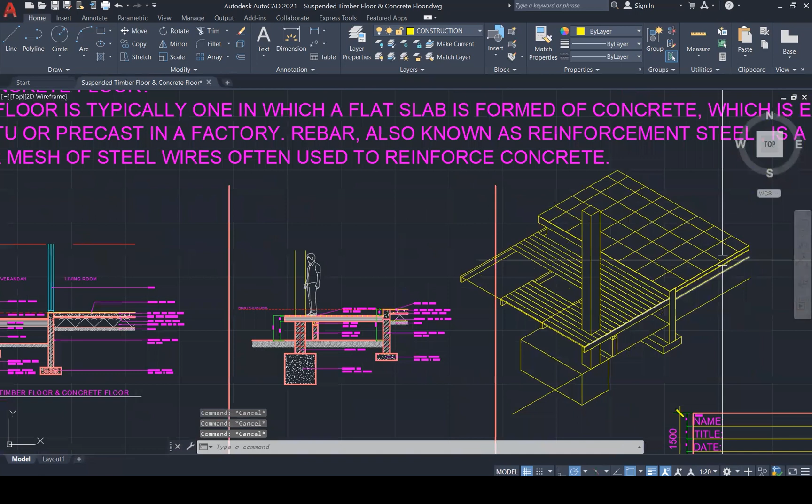So there's a hole in the floor, and also there's a hole here, so you can see the tongue boards and you're able to see floor joists at the same time too.

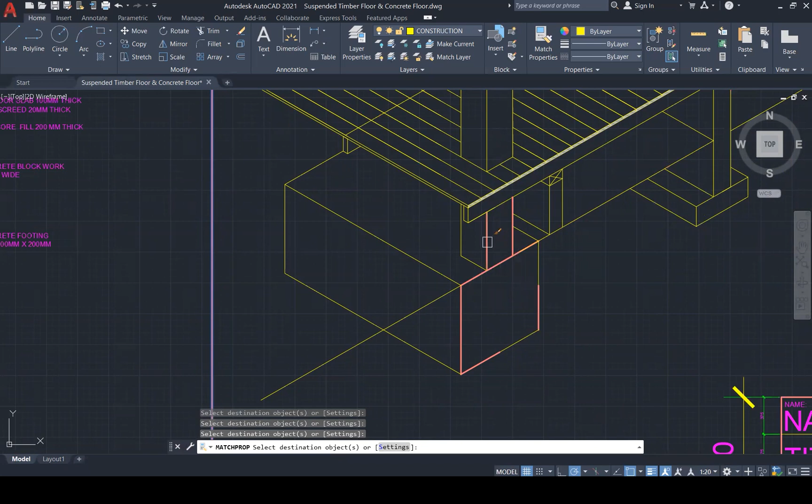Right. Soon finish here. Cool, I think that looks good, that looks good, that looks good. Now, the next thing I need to do is put these into respective layers, so everything that's being cut through needs to get a profile. Beauty.

Imagine you had to do one of these in a CXC examination. Woo-hoo-hoo. Yes. I'll probably actually opt to do it by hand.

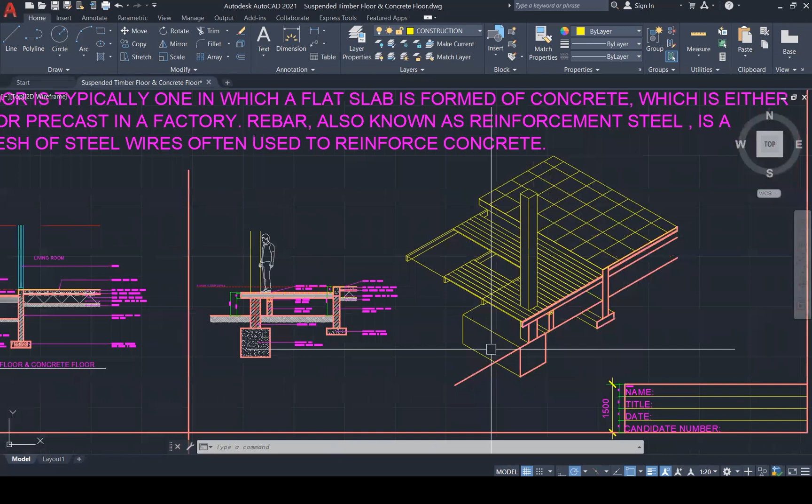Right here, I'm helping, and this is my timber floor. It is my concrete floor. Now I am going to hatch. Okay, so I'll finish hatching, and at this stage I'll recognize that I can get two details out of this drawing. I can get a detail where I cut through the concrete. Let me just show you here, where we're cutting the column all the way down to the foundation, and it's represented here. Concrete column all the way down to the foundation.

That's what it will look like. And you can also get this second detail where we have the column in the background and we just cut through the floor joists. So we'll be just cutting through the floor joists and tongue and grooves right here. The column would be in the background. So those are the two details that you can get from this one drawing.

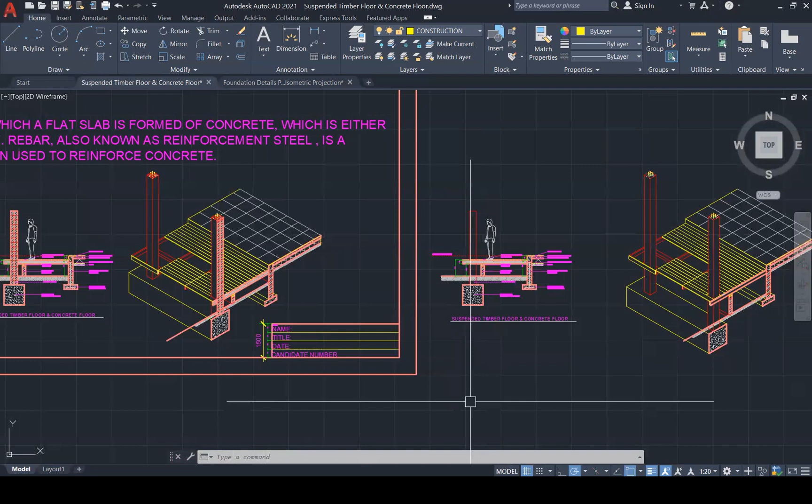So this brings us to the end of our session. What did we learn today? We learned floors, what the term floors mean. We did a timber floor and we did a concrete floor. I showed you an isometric projection and an orthographic projection of these floors, and I produced both of them on detail. I would advise students to practice this until you